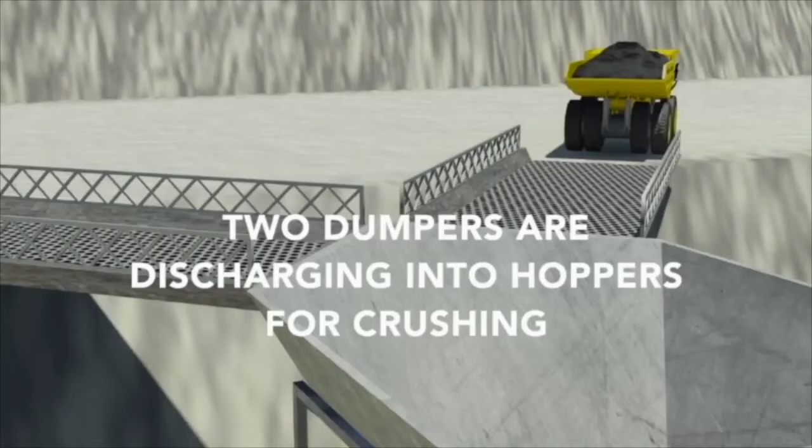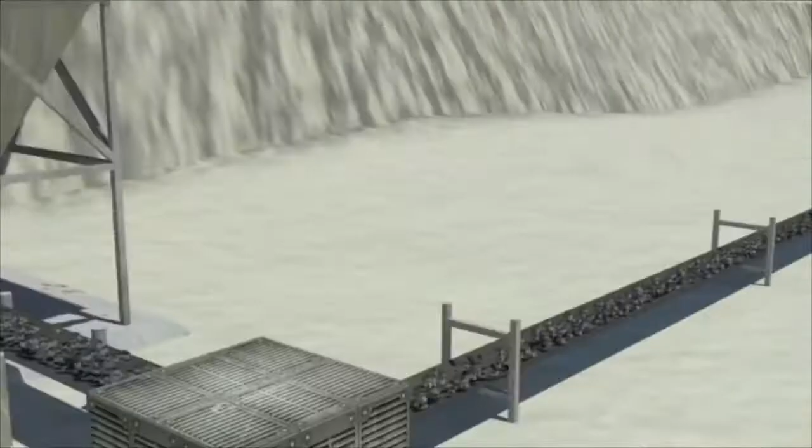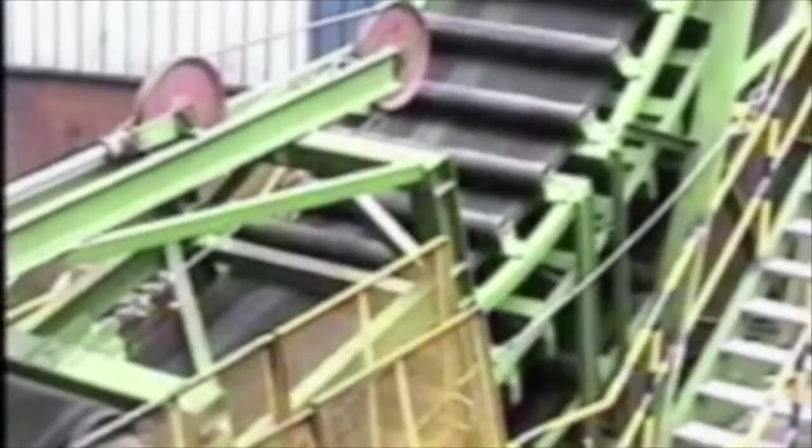So now we are showing the concept of in-pit crushing and the high angle conveyor for transporting coal to the surface, and then carrying coal through an overland conveyor to the washery. So now coal is being discharged onto the high angle conveyor. This is the top belt, and both top and bottom belts are sandwiched and the material is in between.

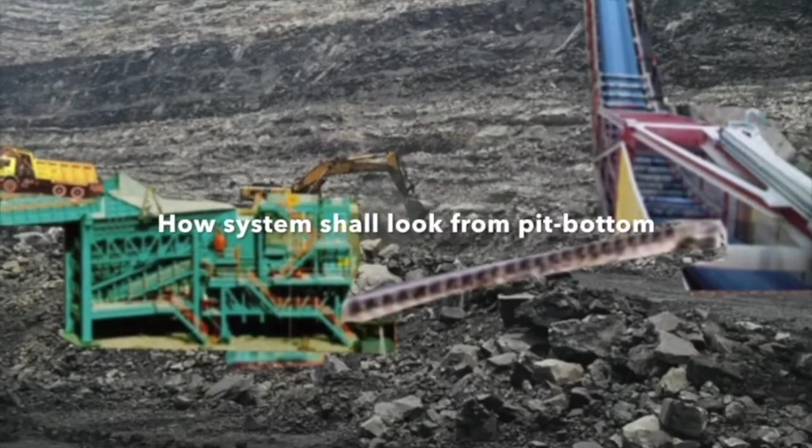We are showing how the snaking is done between the top and bottom belt to hold the material within the belts. So this is the snaking arrangement, and then the coal is taken to the top and discharged from the high angle conveyor onto the overland conveyor, and this is the in-pit crusher at the pit bottom. So this is the concept, and this is the proposed layout for Kathara; with Google we have drawn the layout.

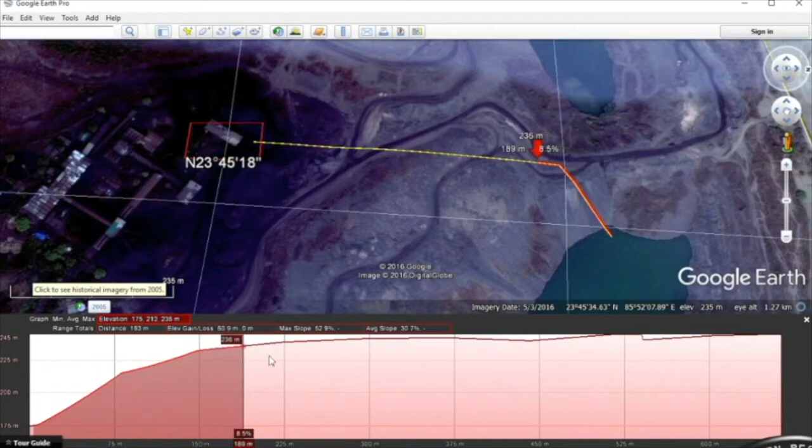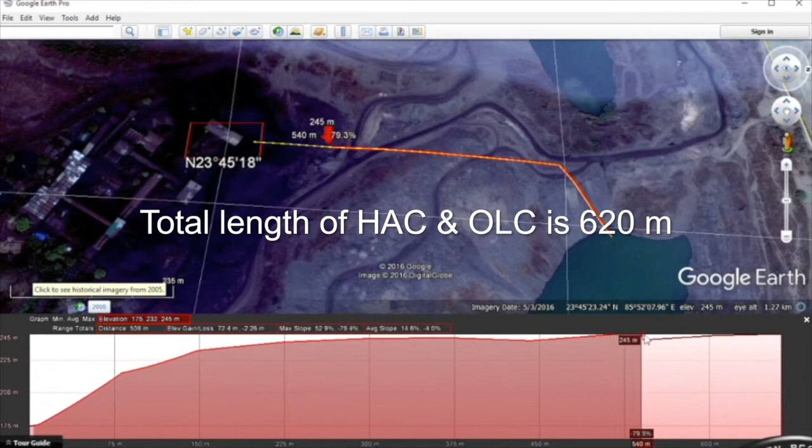So we are showing how it will come from the mine. Here is the mine, this is the yellow line, coming from the mine pit bottom through this yellow line to the pit top, and at this point there will be a transfer hopper, and this is the overland conveyor taking coal to the crushing part of the washery. The total route length is something like 620 or 630 meters. So this is how the high angle conveyor is going, and then through the overland conveyor it is reaching the washery. We have drawn all these things on Google.

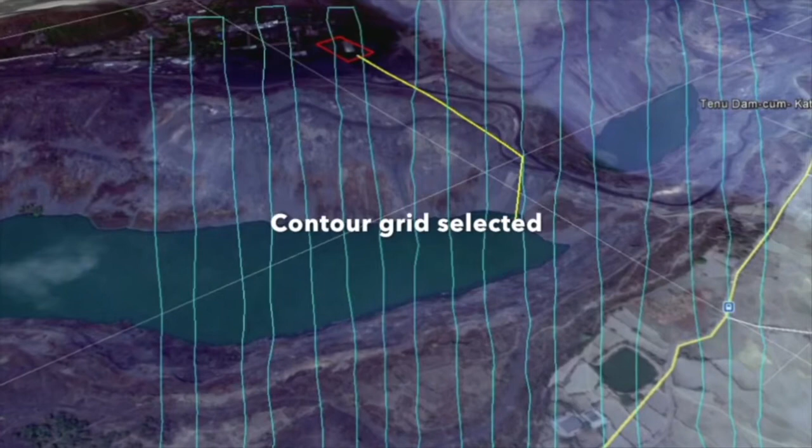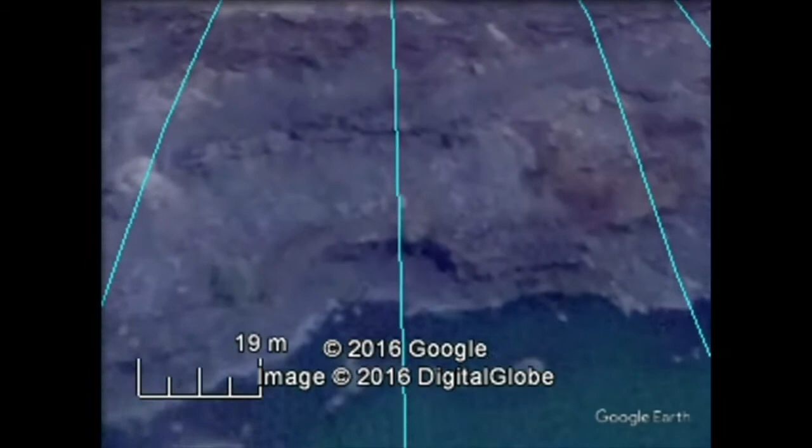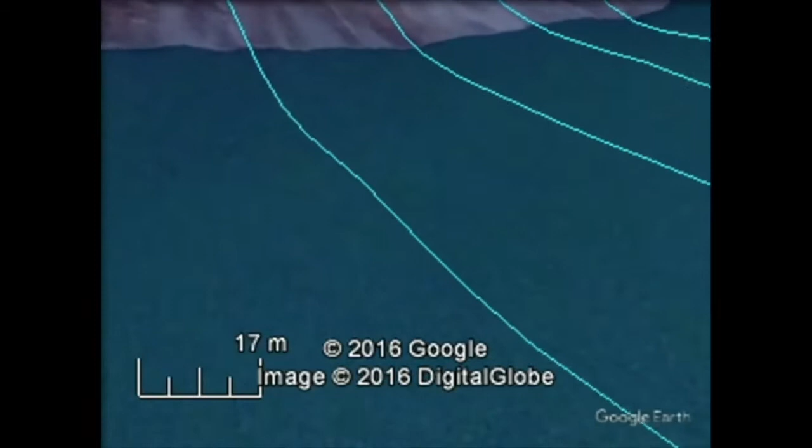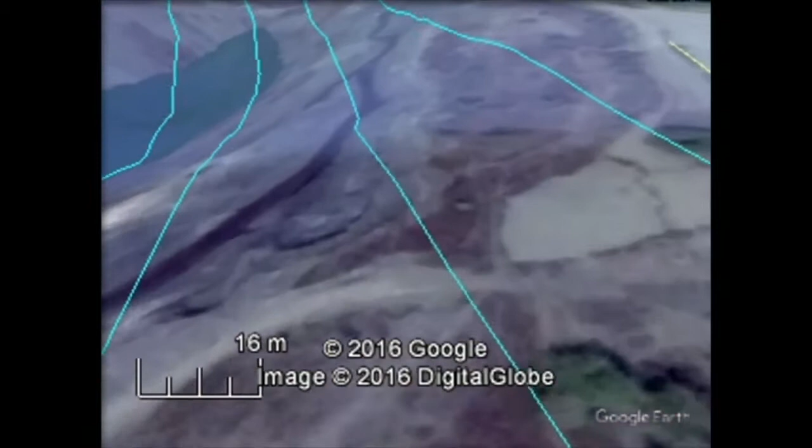This is the contour grid we have plotted. This is how the contour is going from the top. This is the water level. The mine will go a further 50 to 60 meters below the present water level. So this is again coming onto the water and again going up. We have drawn this to plot the contours. This is the haul road at the surface. This is the inclination of the haul road, which is very risky. This is the contour we have generated.

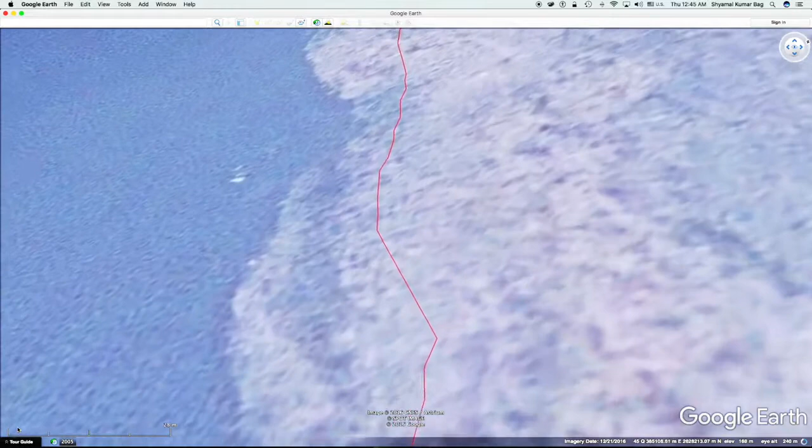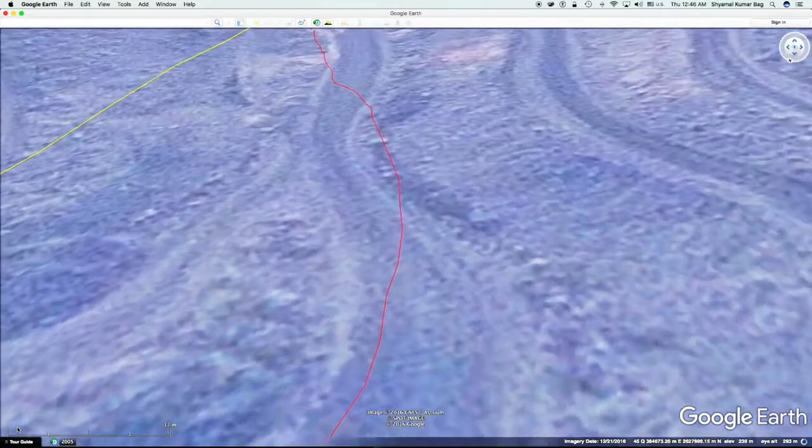Now we are showing the present alternative of dumper transport from the mine. This haul road is imaginary because no dumper is plying now, but we have simulated the situation, and it will be something like this. Here at the surface is the existing haul road through which the dumper shall move. This yellow line is for the high angle conveyor route, and this is the existing haul road. This is the point where the HAC is crossing the dumper road.

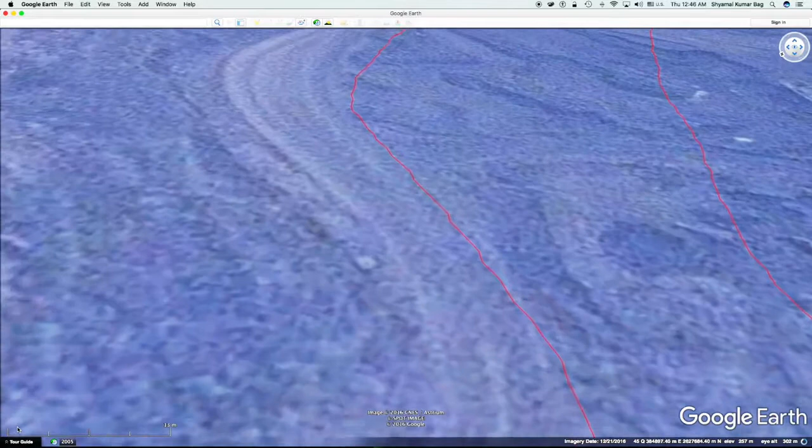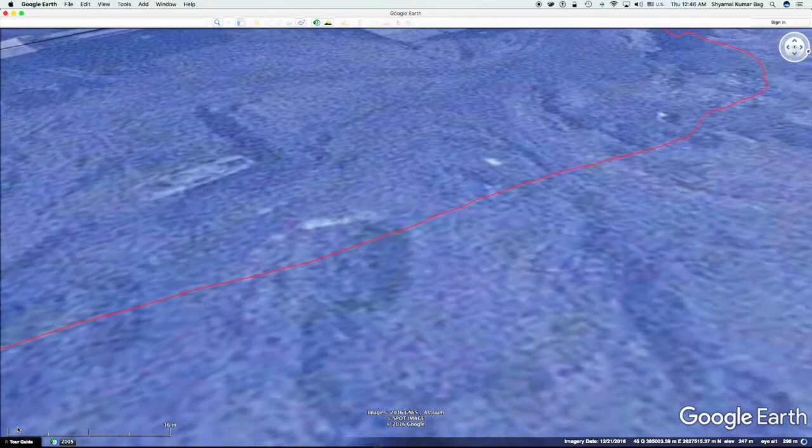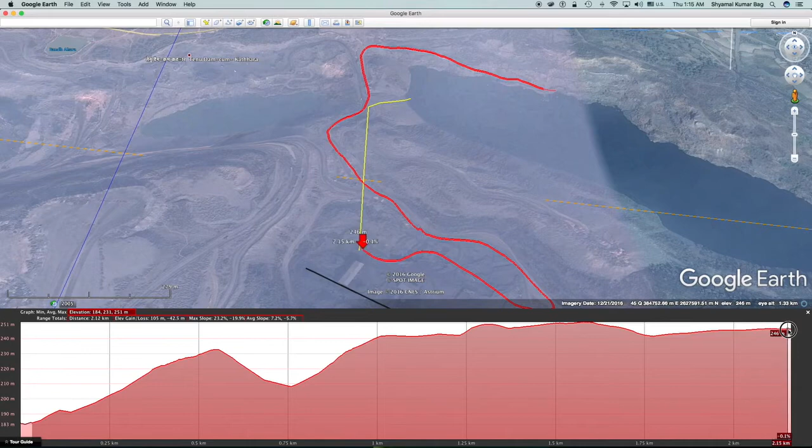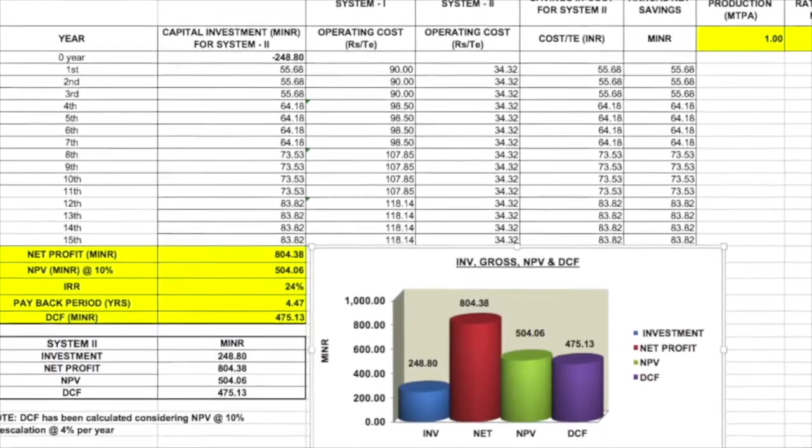The dumper is approaching the washery. Now it is entering the washery gate. Then the dumper is carrying coal to the depot near the crusher, where they will be crushing. This is the elevation level and the total route length of the dumper. Practically, this dumper length will increase with the increase of depth. Now this total distance is something like 2.15 kilometers. So for the HAC it is 620 meters, whereas for the dumper system it is 2.15 kilometers. So it is almost one quarter.

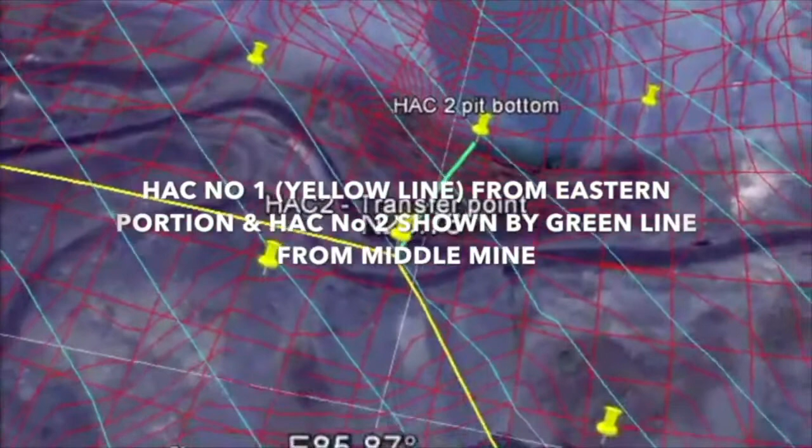So these are the various economic calculations and evaluations we have done, in a separate report. This is another concept we have shown. It is possible to bring the coal from the central sector mine to the same point too, and the entire coal can be transported by overland conveyor. Green is the HAC from the second mine and yellow is the HAC from the eastern sector mine. The entire contour has again been taken to Google. This is the eastern sector mine. This is the high angle slope.